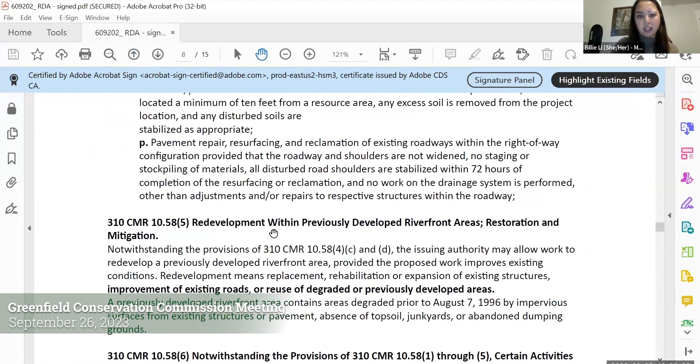Travis, do you want me to share my screen and run through a little bit? Okay, great, yeah, that'd be great. I'm just going to ask you all to bear with me because I'm operating from my home office on my laptop, and I am used to having 3 screens and a nice mouse. Let me just move this over. All right, so I'm not going to go over the project description too much, but I did want to highlight some of the wetlands protection exemptions. Is that a good zoom level for everybody? Yeah, okay, great. I know we're all working with different setups.

So the main thing here is that we're redeveloping a previously developed area. This is a resurfacing project. There are going to be improvements to bike and ped accommodations, so that should be good for the area. And then there are also going to be some improvements to the drainage system, as Travis was reading out in that project description. There is the addition of some drainage structures, such as catch basins.

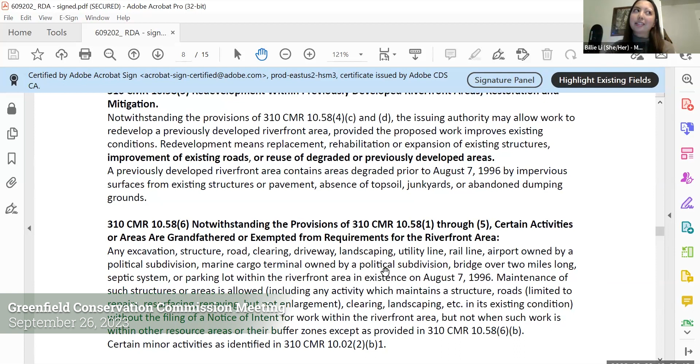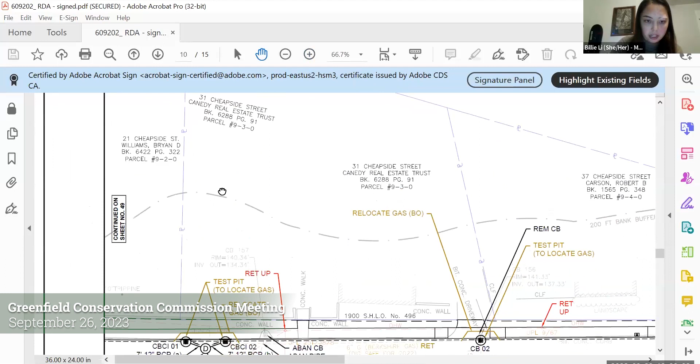There is a MassDOT design standard that requires 2 catch basins on minor arterial roads, which this is classified as. In some of these areas, for example on Cheapside Street, we've proposed 4 catch basins. Right now there's only 1 catch basin, and there's some serious erosion going on. It's even started to deteriorate the asphalt in the roadway, and one of the guardrail posts is completely exposed. That's a result of floodwaters overtopping the roadway rather than going through the drainage system as designed. Adding those catch basins will meet MassDOT standards, developed in conjunction with federal highway standards, and should improve flooding during major storm events.

In this plan set in the RDA, I included the cover sheet just so you guys can see the locus map. And then I included just the sections of the utility and drainage plan that have these additional structures.

We're also planning on making improvements to these head walls and outfalls. A lot of those outfalls either have erosion happening or the head walls are starting to deteriorate. For those outfall improvements, we're going to be putting down geotextile fabric, then some crushed stone, and then some riprap about basketball size. Over time, that should really improve the erosion happening in that area.

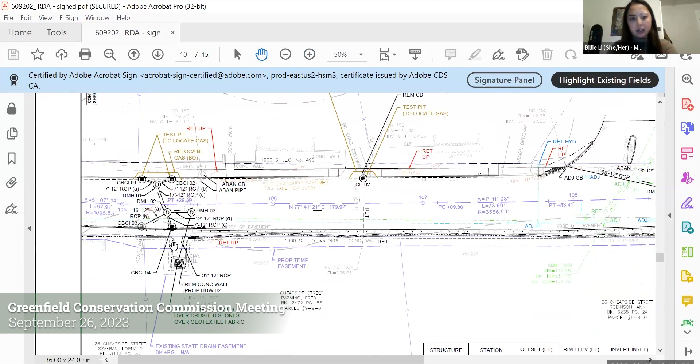There are 3 of those drainage outfalls - you can see the little cutouts for them. Those are going to require a temporary easement, but it's temporary, just so we can get in there and make those repairs because there's significant erosion happening at those outfalls.

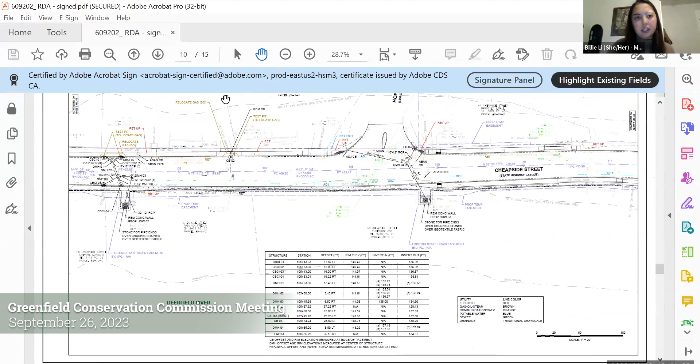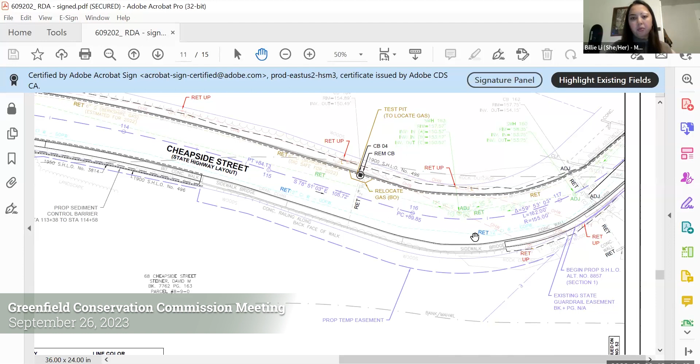As you can see here, this dotted line is the bank mean annual high water line, and these areas are within the 200-foot bank buffer / 200-foot riverfront area. I also wanted to note another resource area on this project is land subject to flooding, right in this corner where Cheapside Street comes under the railroad. Elevation is going to be maintained, so no issues there, but I wanted to mention that was another resource area we were aware of and took into account in our design considerations.

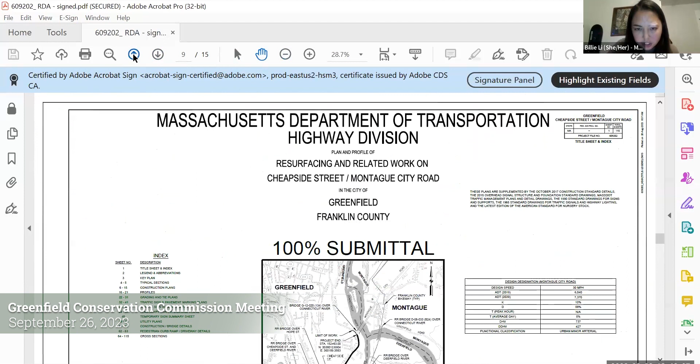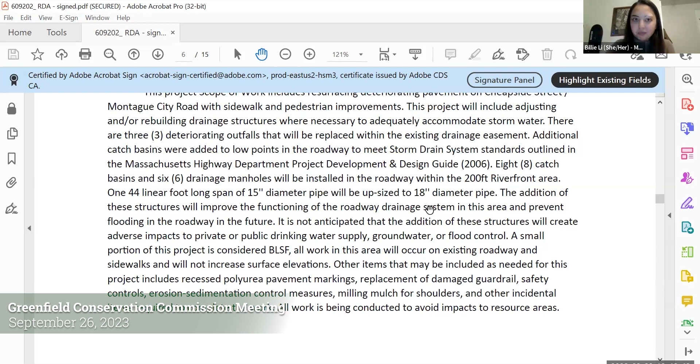So that is my quick spiel on it. But if anybody has any questions, I'm happy to address those.

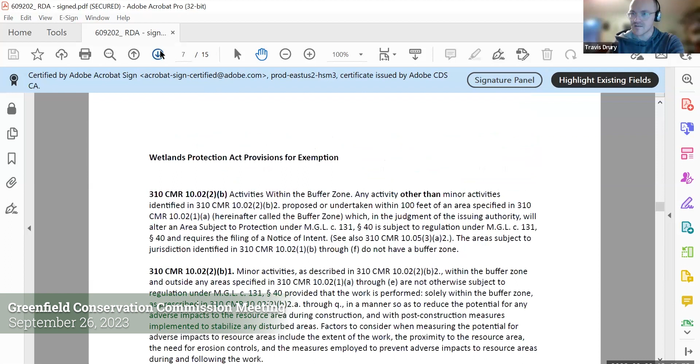Is this a limited project? What do you mean by limited project? Is it an ecological restoration limited project? Is it being filed? No, this is just a regular RDA, sorry. Okay, maybe I'm in the wrong one. Yeah, I'm in the wrong one.

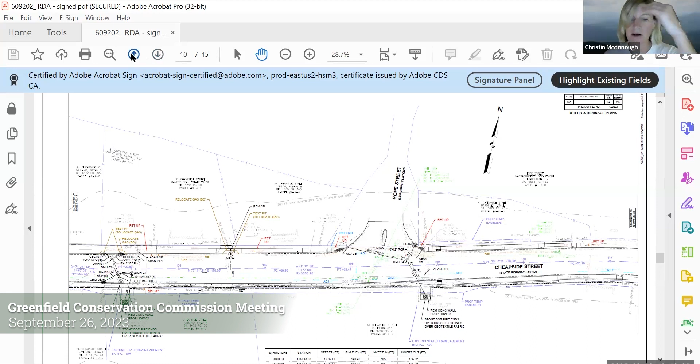My apologies. No worries - would you mind just addressing the exemptions again? Absolutely, it was kind of cut off before. I think I saw the riverfront area ones, but there was something above it that I couldn't catch.

So up here is 10.02(2)(b)2, which discusses some activities that are exempt, and that's typically the exemption for resurfacing, milling and resurfacing. We put that in there because this is a resurfacing project. And then in terms of the redevelopment within previously developed riverfront areas, that's more for these drainage structures and that kind of thing happening within the roadway.

Okay, so it's within the existing right of way. Mhm, thank you. The only thing that's outside are those drainage outfalls, which will require temporary easements. I don't know if any of you have been out there recently, but the situation with the erosion is definitely calling for that work to be done.

But it's exempt. So the drainage outfalls will require a temporary easement, so it's outside of the state highway layout area, but that area is developing previously developed riverfront area because there are already drainage outfalls there.

I guess it seems to me that the outfalls—like all of these exemptions talk about being within the existing roadway. And since that's outside the existing roadway...

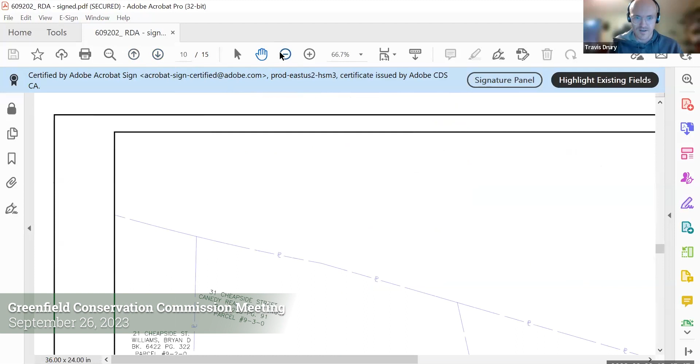Could you show those on the map again? Yeah, absolutely. Those were within, or at least two of them were within riverfront area. Maybe all three of them are within riverfront area.

So here's the first one. As you can see, our state highway layout ends about here, and so it would require this temporary drainage easement in order to do that work. Again, these aren't new outfalls—these are existing outfalls. Head walls are deteriorating, they don't have a splash pad, so they're creating an erosion channel down into the river. We would be replacing them where they exist now.

Is that riverfront area already developed where you're going outside the right of way, or is it lawn? So where the drainage easement is shown right here, there is an outfall right there, so we're replacing the drainage outfalls. So it's concrete, it's not grass. No.

And you said the footprint isn't really increasing for any of these? No, the footprint is not increasing. This is just a temporary easement that's required to get in there and do the work around the head wall—it's an existing head wall, or drainage outfall with a head wall that's there, and they're going to go in and repair the head walls if they need to, and then put in a splash pad. Not concrete—it's going to be geotextile fabric, crushed stone, and then riprap about basketball size on top of that to prevent further erosion in that area.

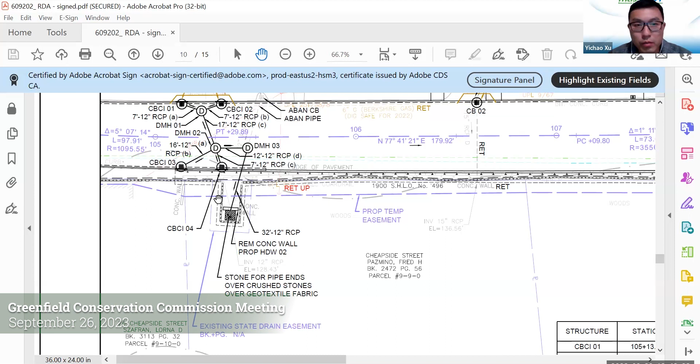Billie, can you just zoom in a little bit? For the concrete wall—you can see this concrete wall in gray, that's the existing one. And we have a leader that says remove concrete wall and proposed head wall. Number 2 means we're gonna remove the old wall and build the new wall there. Another leader shows the stone for pipe ends, which is a big stone weighing between 50 to 150 pounds over the crushed stones.

The crushed stone is about 3/4 inch stones over the geotextile fabric, which can mitigate the erosion that happens. The reason why we put smaller stones on the geotextile fabric between the bigger stones is just in case the bigger stones are too heavy and would penetrate the geotextile fabric. So it's more like boulders, then your angular riprap, then the geotextile fabric. Yes, thank you for explaining that. Oh, you're welcome.

Any other questions?

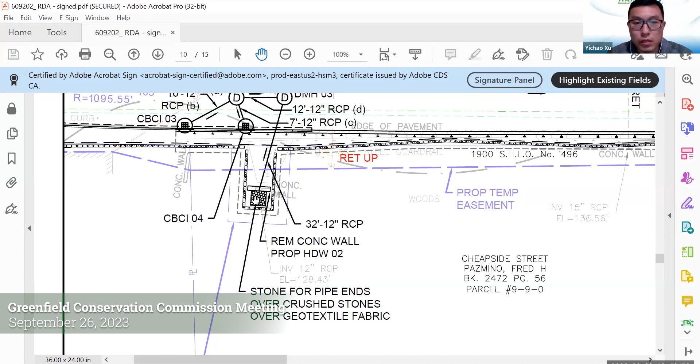So I want to add in something else with the existing easement. Billie, can you just move the plan a little bit up? You can see the purple leader down there—move down a little bit. Right there, yeah—existing state drainage easement, but this is the older plan.

It says book and page number not available, not applicable. But I did a thorough study in the Franklin Registry of Deeds, and I did find the book number and the page number back to 1951. I updated it in our right-of-way plans, but we definitely have this easement belonging to MassDOT. So this is our permanent drainage easement.

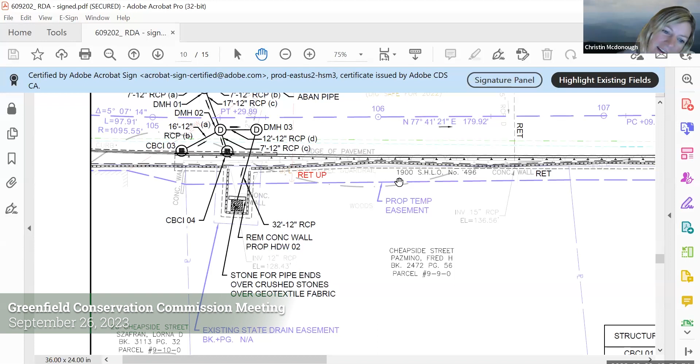The purple dash line, or where the leader is pointing to - I can't tell if it's gray or purple. This is on the south side. I think it's a purple one. Yeah, it's a purple one, pretty thing. Oh okay, sorry, I didn't realize that.

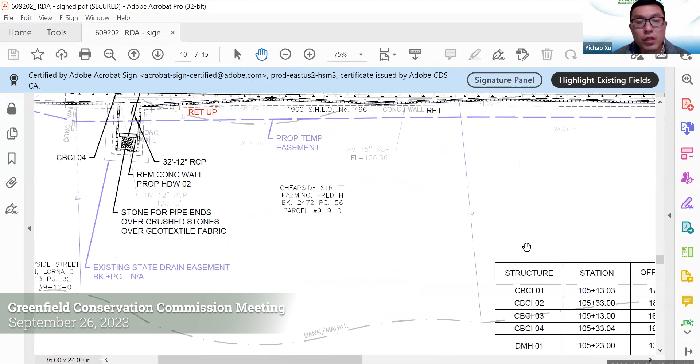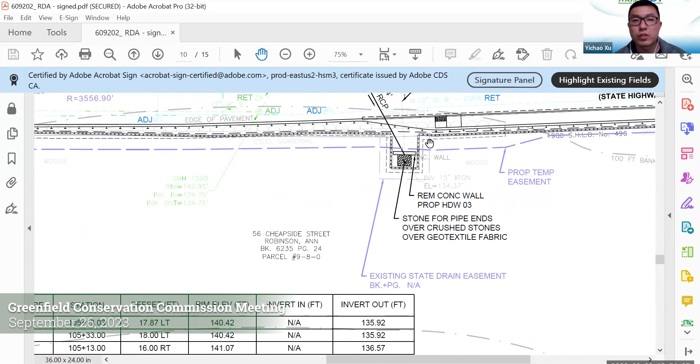Is that the case for every single one of the head walls, Yichao? I think for this one, the second one, and the third one. The first one - yeah, we require the permanent drainage easement because the current head wall is within our state highway layout lines. We're going to extend all the stones and fabric, geotextile fabric, which is going to be beyond our state highway layout line. That's why we need to require the permanent easement to do the proposed work.

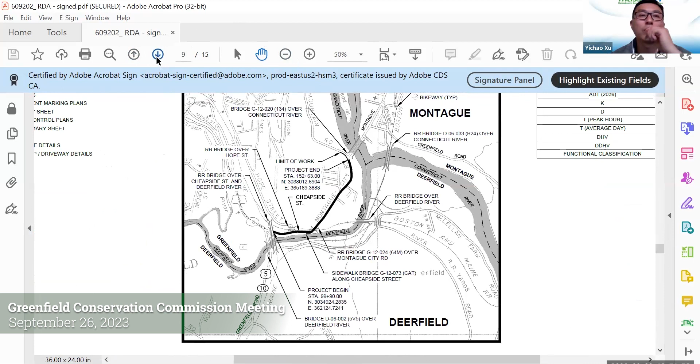So if you go to the first sheet, sheet 9. This one - oh, you don't... no, I only have the highlights from the utility plans. I didn't put the whole key in there and everything. Whatever that area is, the first head wall is not a problem.

So yeah, I actually misspoke. This purple line here, you can see existing state drain easement. So Yichao, correct me if I'm wrong, it's technically outside of the state highway layout, but we do have the drainage easement there. Yeah, we do have - we have the book and the page numbers, which we acquired in 1951 back when this street was originally built.

And you guys have an annual operation and maintenance plan approved, you've got your BMPs already kind of approved for any work that you do, right? So any questions we might have on erosion and sedimentation control are probably in that OMP. Yes, and we have MassDOT standard specifications for all of our construction projects that require erosion and sediment controls. I guess I'm mostly wondering if you're going to have sediment bags in catch basins, if you're going to be doing any kind of earth disturbance around them.

Yeah, so exactly what erosion and sediment control is used kind of dips into the means and methods of the contractor, but it is a requirement for them to use erosion and sediment controls - we're just not going to be specifying exactly how they should be doing it.

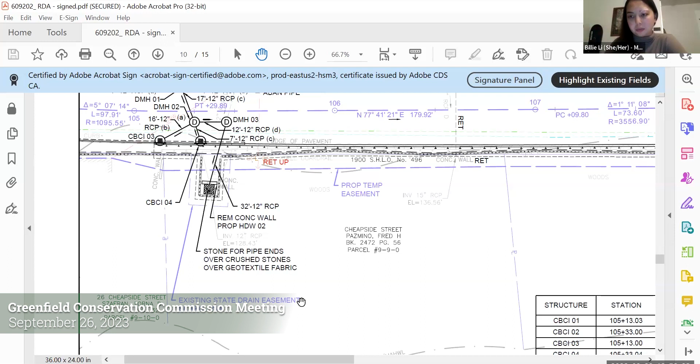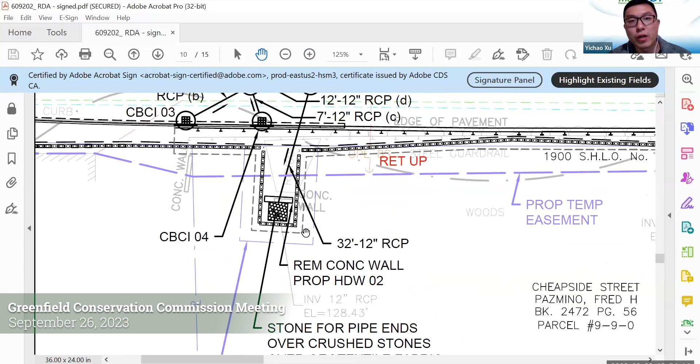So I do propose all these sediment control barriers at the bottom or top of slope. You can see that's what this rectangular pattern is, right? Yeah. And for all the existing and proposed catch basins, I also proposed asking the contractor to put a silt sack to prevent all the silt or fine particles from going into the river systems.

Can you tell me when the work is planned for, and ideally what the time frame would be, how long it would take? Yichao, do you know the ad date off the top of your head? The ad date is January 2025. I'm expecting the contractor to start work probably in summer, maybe early spring of 2025. Our estimation for this whole project is going to be one year.

I believe the contractor is going to start - they're going to set up all the silt fence and sediment control barrier first, then they're going to start the drainage work. Because this is basically a resurfacing project, we're just going to mill out all the HMA pavement. So they're going to do the drainage work first because they have to dig holes everywhere to drop in the proposed drainage structures. After doing that, they're going to do the milling and repaving, together with all the other sidewalk construction and the proposed guardrail installation.

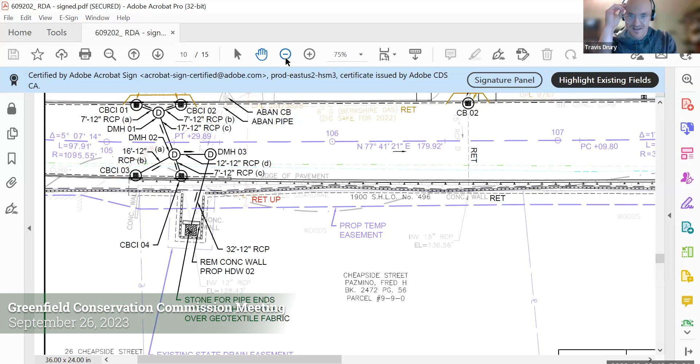Yeah, so I'm just trying to go through the logic of the exemptions in the Wetlands Protection Act, because I think you have to read this and refer to that and refer to this. Do you want me to go back to the exemptions I included here? The first page is 10B 2B2, which is just the pavement portion, but these bottom two are kind of about the riverfront area.

And for BLSF, just to reiterate, you're not doing any subsurface alteration like flood storage capacity changes, right? The elevations of the roadway and sidewalk are going to be maintained in that area, and it's also a very small portion, but yes, they are going to be maintained.

So I guess, 2B1, 2 — I'm not sure. I'm kind of getting hung up on the pavement part too, because in the exemptions, what am I looking at here? When I'm looking at the Wetlands Protection Act, I'm looking under redevelopment, number 6.

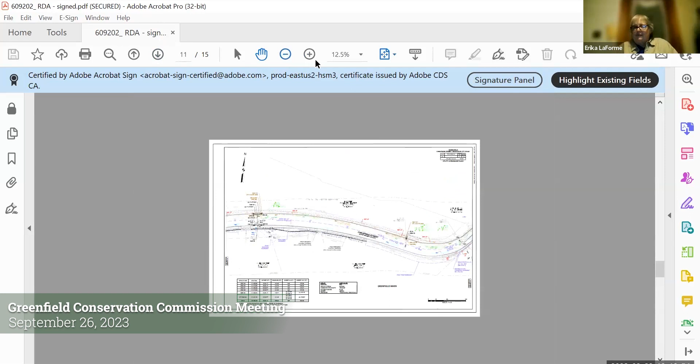In terms of increase in impervious area, there is going to be a slight increase for those sidewalks, but that is within the state highway layout. Oh okay, the state line. Okay, mhm.

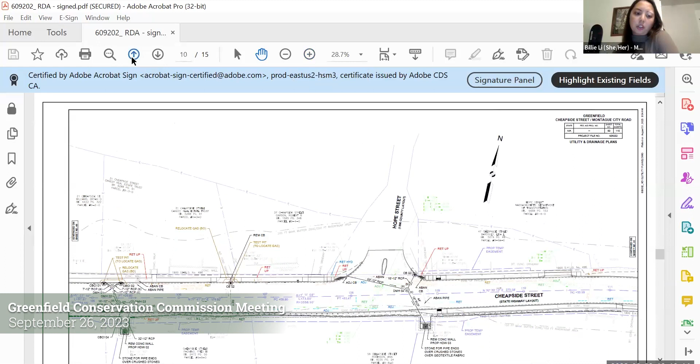And so I guess with the easement, in my mind, the easement is just saying that you have the right to have drainage structures there, but for the exemptions, that requires the work to be within the existing road surface area, which that would not be. But having the easement does say that you are allowed to use that land. That's my understanding? Yeah, I think typically the state highway layout is thought of as the footprint.

Because that includes guardrail and all that stuff too. So yeah. But then, unfortunately for this project, there's also that language that says it would be exempt if no work is being done to the drainage. So I guess, yeah, that drainage piece is definitely the gray area here.

So for the commissioners, that's where I'm hung up on. It seems like it would have to be like if they were replacing existing manholes and existing catch basins, then I think that's fine. But I think because it's an expansion and modification of the stormwater system, and the fact that it's not just within riverfront area, but also there's the buffer to the bank, there are other resource areas and buffer zones going on too.

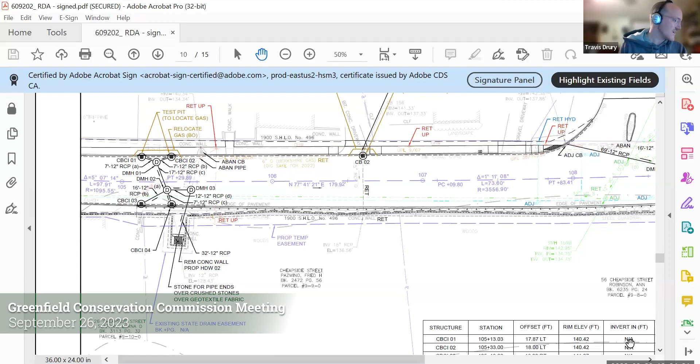So a motion for positive determination, that was seconded. Any other discussion among commissioners before voting on that? Just looking, I gotta switch the video so I can see Fletcher to make sure we weren't all trying to talk. Okay, yeah, no, I didn't have any additional discussion. Okay, yeah, I just wanted to make sure I wasn't skipping anything.

All right, so we'll do a roll call vote on that motion for positive determination. Fletcher, aye. Erica, aye. Kristen, aye. All right, I'm also an aye, so that motion passes.

I guess we'll be requiring a notice of intent for this project. And I mean, it's not worded in the motion, but it does sound like it would fit within redevelopment of riverfront area, just based on what I'm reading right now. Yep, absolutely.

Yeah, my recommendation is in the NOI, just beef up your description on how your drainage improvements are not just a safety issue, but protecting down-gradient resource areas. Consider that in the application. DEP cares about safety, but cares about resource areas first. Right, of course.

All right, great, thank you for that. And then in terms of the positive determination, is there a form that you guys send to us? Yeah, I think Mitch will send it. Mitch, I don't know if you can confirm. I think it's the order of conditions form, but it says positive. Okay, yeah, and you just check the positive box and send that.

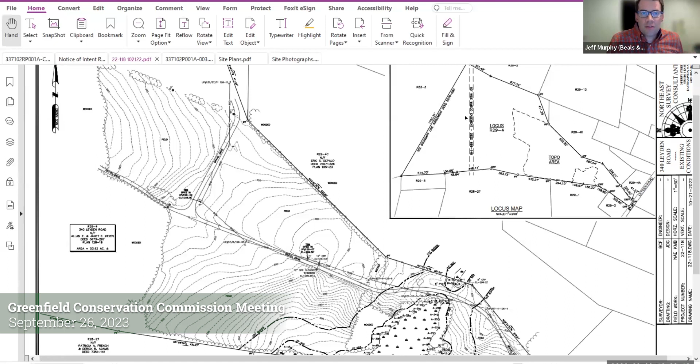So as Colleen mentioned, the project is located on an approximately 54-acre parcel at 340 Leyden Road. The proposed solar project is going to be located within the limits of an existing cleared area that's been maintained as a grass field and used for haying and agricultural purposes.

There's an existing driveway that services access to the existing single-family home on the property. That gravel driveway starts from Leyden Road and follows the central portion of the property, going between two existing on-site wetland areas, the boundaries of which were previously confirmed as part of an ORAD issued in November of 2022.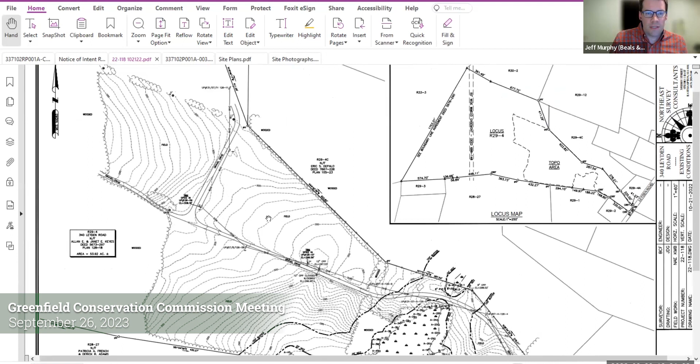The driveway continues through the existing grass field, generally running through the center of the field, and then turns to the right and goes to where the landowner's house is. So the project is primarily going to be located in this central field.

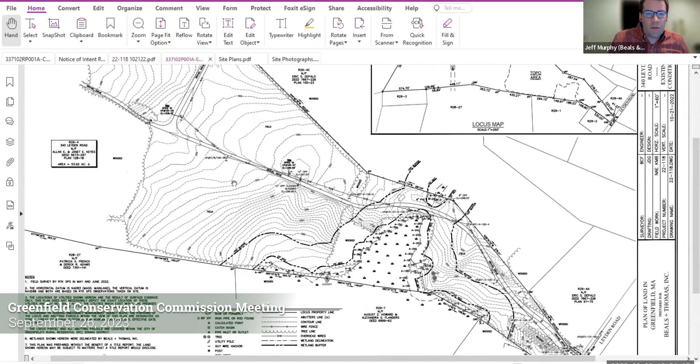As part of the project, just a quick overview of the layout. There's going to be some reconfiguration to the existing driveway within the vicinity of the area where the panels are going to be placed in that open field.

That was primarily to consolidate the footprint of the panels, and also serving multiple needs to maintain access for the homeowner, basically to reroute the driveway along the northern property boundary, which will then split off and provide access to his house.

There'll be a continued section where the road is rerouted around the panels, and there'll be a cul-de-sac turnaround area provided to maintain vehicle and truck access throughout the property, as well as for future dual-use solar project needs. The existing gravel driveway will be discontinued through the central portion of the site, and a T turnaround will be provided for fire department access.

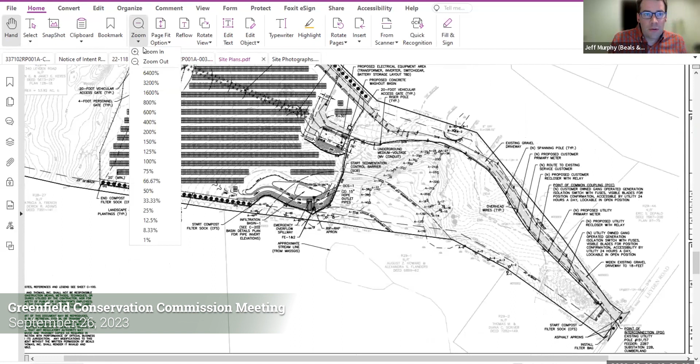So I'll switch over to a more zoomed in view of the project. As I noted, the existing driveway is going to undergo some improvements associated with the proposed solar facility design.

There's currently utility poles and overhead wires that run along the existing driveway that provide power to the existing house on the property. In order to maintain that, and also provide a future electrical interconnection between the project and the electrical grid, there's going to be some additional utility poles installed along the road, essentially creating two parallel lines of poles on either side of the driveway.

In the section where the driveway runs between Leyden Road and this vicinity, there's going to be some slight improvements done for utility company requirements. Then in the section where we go between the buffer zone between the wetlands, the driveway is going to remain as is, and then it's going to split off just before you enter the field and continue along the outside of the fenced-in area.

So the proposed panel area is going to be fenced off with a 7-foot high chain link fence that will have a 6-inch wildlife gap at the bottom of the fence to allow for small wildlife passage.

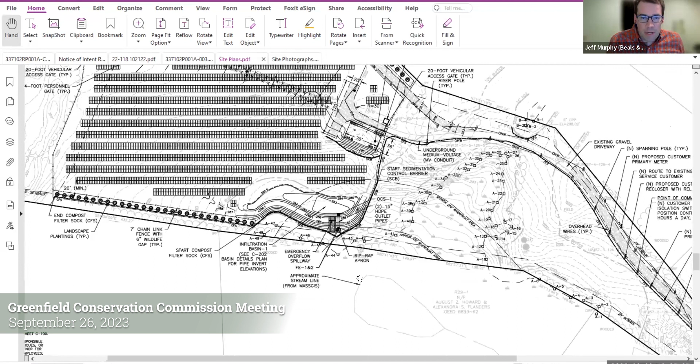And we're also doing work within a previously altered section of the outer riverfront area, which is associated with an off-site perennial stream. That area of disturbance is roughly 2% of the total RFA on site.

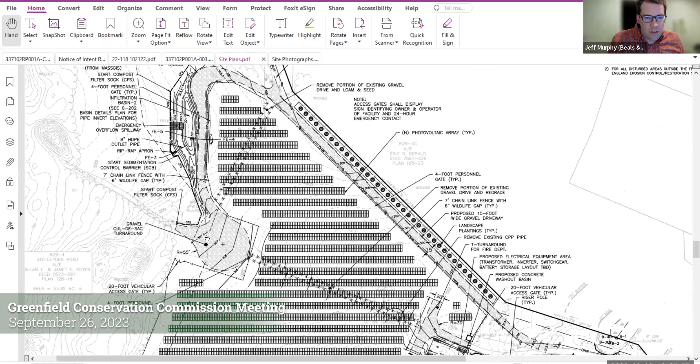And then we also have a portion of the site here at the western extents that is within the NHESP priority habitat. There's a small section of the project, including this piece of the turnaround, as well as the western limits of the array and fence line that go within that zone.

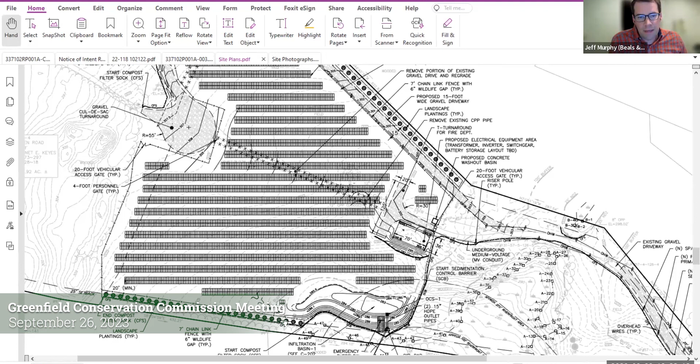In terms of other general things to note, we're proposing screening plantings, which is more something that's just going to be associated to satisfy the screening requirements of the local solar bylaw, but figured that would be worth mentioning as well.

Again, the idea is to try to keep the project contained within that existing grass field that's out there, doing minimal grading, and relying on the existing drainage patterns that are out there today. That's kind of the general overview of the project.

So I don't know if there's anything else that Caroline wants to add to that, anything I didn't mention before we kind of turn it over to questions.

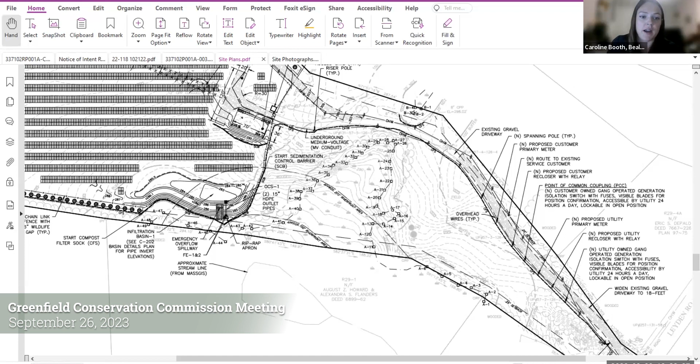Yeah, thanks, Jeff. Caroline Booth, Beals and Thomas. I think just additional items to add, as Jeff noted, part of the site is mapped within NHESP. Those are areas that are previously cleared. This was submitted as a combined notice of intent and MESA filing, so it was provided to NHESP to review and provide comments. We're still within that 30-day window.

I haven't heard anything from them yet. I'm not sure if Mitch has an update on that. And we did receive some preliminary comments from Mass DEP, which we have also addressed via email, which I believe Mitch and Travis were also on. Other than that, I think we can take any questions from the commission.

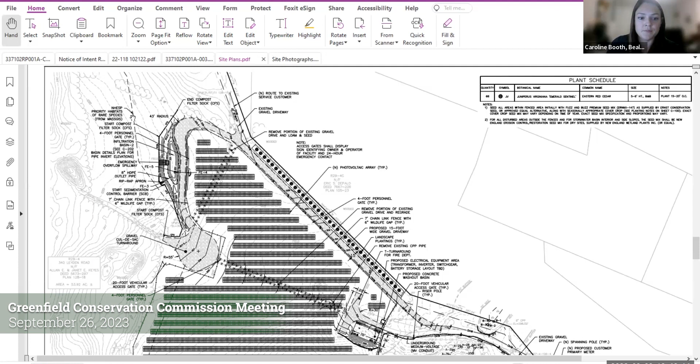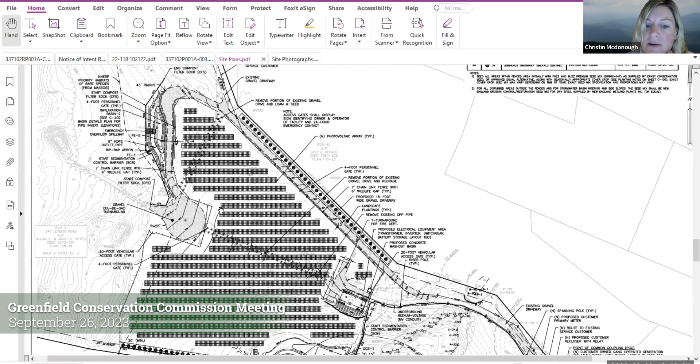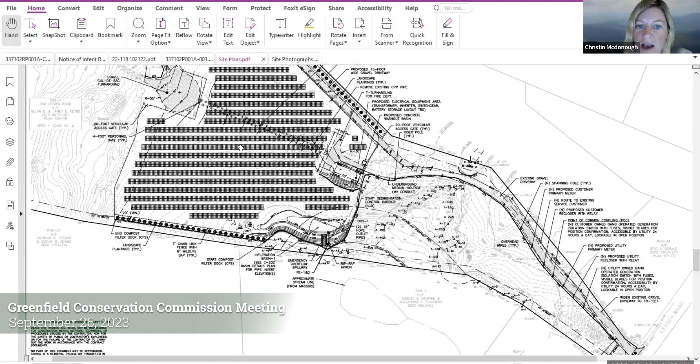Anyone want to start off with any questions? I have a few. I remember walking the site when you guys filed the ANRAD, and I know you've since been issued an ORAD back in November 2022, for the approval of those two bordering vegetated wetland lines. I was just curious, the ORAD's for those two wetland lines, but the development is much further to the west, I'm assuming. So, Mitch, maybe you can remind the commission if that ORAD locks in the wetland lines for the entire parcel, or does it just lock in the wetland line that we reviewed as part of that ANRAD? Just the parts that were reviewed.

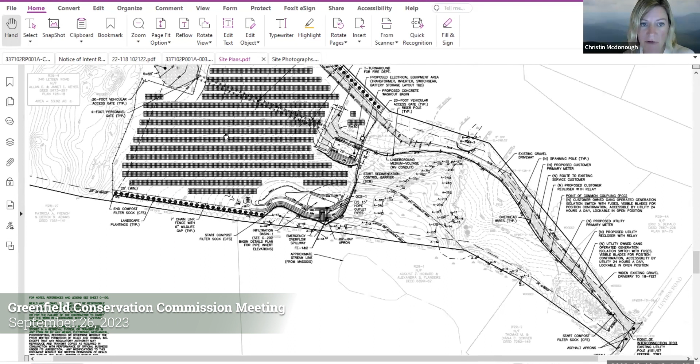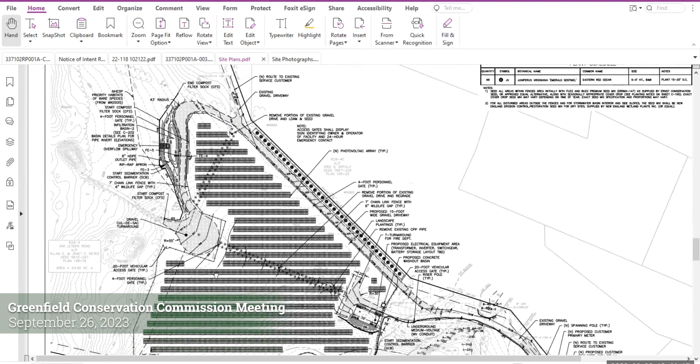So we don't know if there's any jurisdictional resource areas associated within the 200-foot or 100-foot of the solar array other than the A line? It looks like, on the western portion, it's way back. Yeah, this site was evaluated by a wetland scientist for the areas within 200 feet of the project, and there were no other areas identified. As Mitch mentioned, though, the Green River is located on the far west side of the site, which is well over 200 feet away from the project.

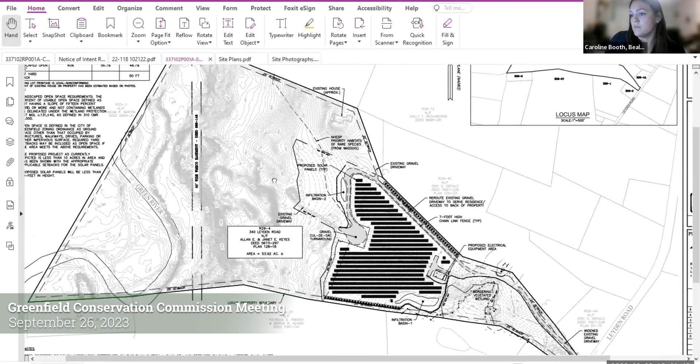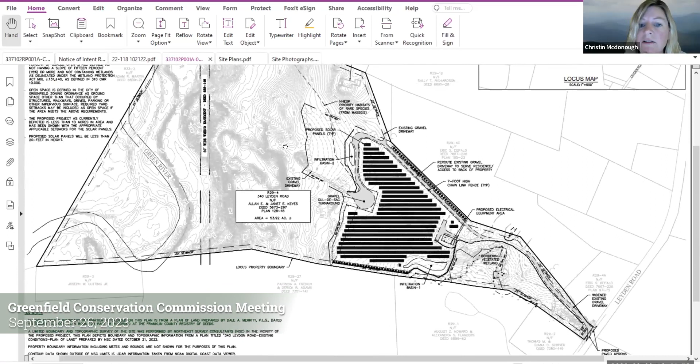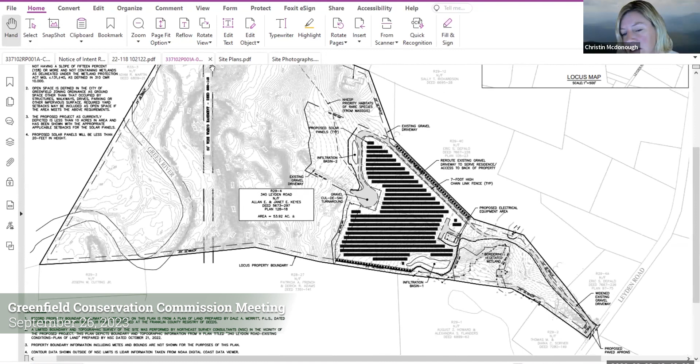I know we can't really get too in the weeds with this until we have a DEP file number, but one of the questions that I had when I did the site walk was about that culvert that's between, I guess, the A line and the B line. I can't remember what the culvert looked like. It was just like I don't remember if it was metal, corrugated metal or plastic or what, but I'm curious if that will have to be upgraded to withstand construction vehicle traffic during the solar installation.

We're not anticipating any changes would need to be done to that. It's called out as an existing 8-inch corrugated polyethylene, probably an HDPE pipe. I believe it's pretty decently far below the surface grades there.

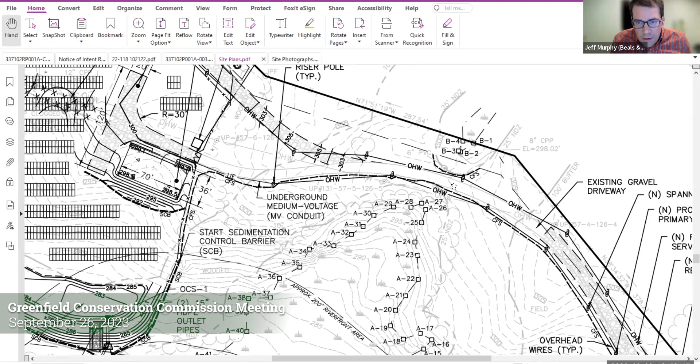So we're not anticipating that would be impacted at all by construction traffic. Okay, so you've already accounted for the heavy loads and stuff coming in. You think that'll handle it? Yeah, I mean, I think it's pretty far down.

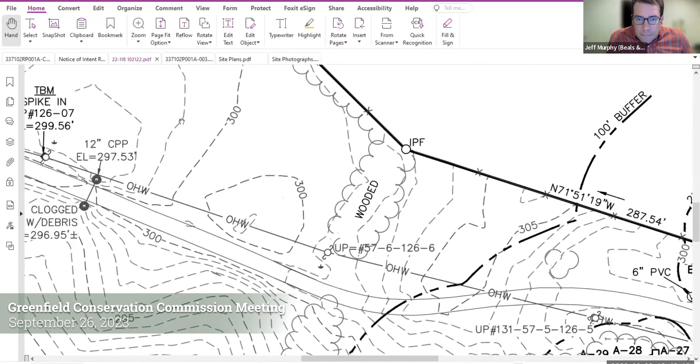Trying to zoom in on a contour here so I can see the pipe invert at the upstream end, 298, 300, 301. I mean, I don't anticipate that being an issue.

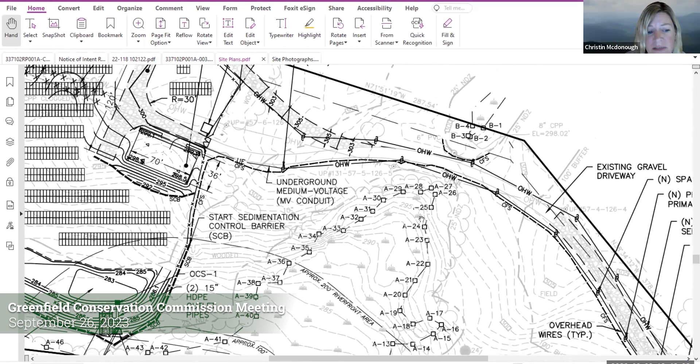I just had one other question. You had mentioned that the bioretention basin is really close to the wetland limit, and it's also in the outer 200-foot riverfront area, but you had said that it was previously disturbed. That's agricultural land right now, correct?

So it's just, yeah, this is kind of what it looks like. It's all basically mowed, maintained area. So the basin is going to be located generally in this spot where the topography levels off. It's going to be a bermed area here, a very shallow basin, basically providing some runoff rate attenuation prior to discharge here. So you can kind of see the existing tree line in gray here.

So it's generally in that corner of the site. This dark line here is the outer portion of the 200-foot RFA. And again, the 25-foot no disturb line is generally a few feet off of where we're proposing our sediment control barriers. So we're proposing a sediment control barrier at this downgradient portion of the site, consisting of a silt fence and a straw bale, but elsewhere calling out as compost filter sock. Generally in the areas where water gets concentrated, we like to have a silt fence for better protection of the resource areas.

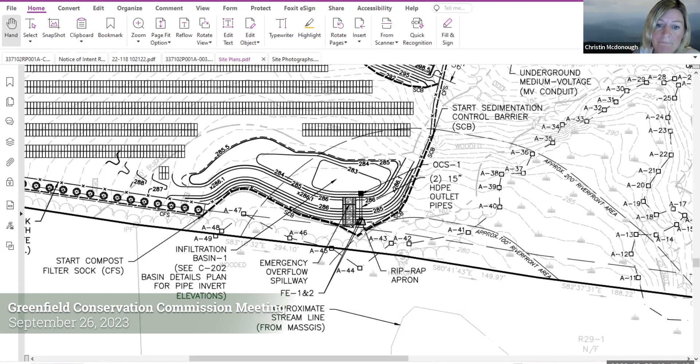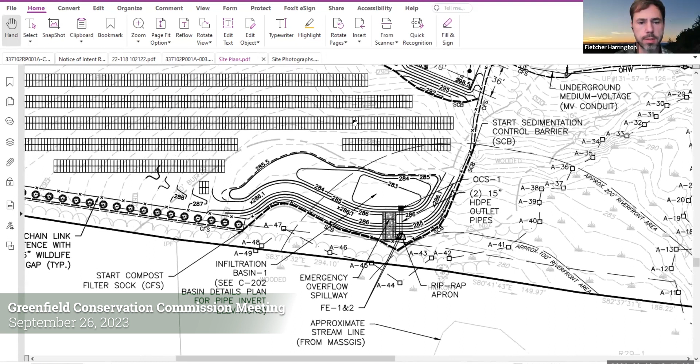I was just wondering, sorry if I missed it, but is there grading within the field other than driveway improvements and the basins? Is there any other sort of large areas of grading?

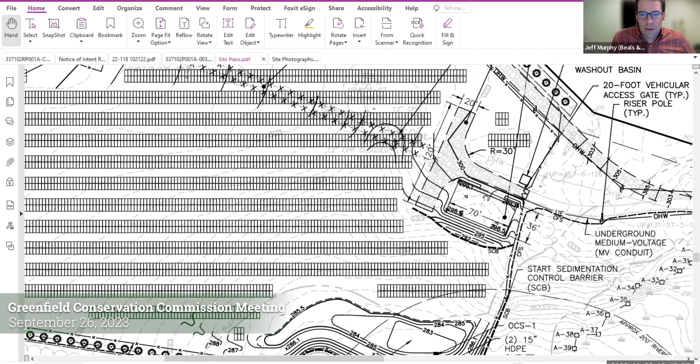No, so the idea is that we're going to try to maintain the existing topography to the extent practicable. Like you mentioned, the areas where we're going to be having the equipment pad will have to be flattened off, and then for the driveway, the goal is to basically remove the existing portion of the driveway that runs through the middle, and then we'll just keep all the other grading as is.

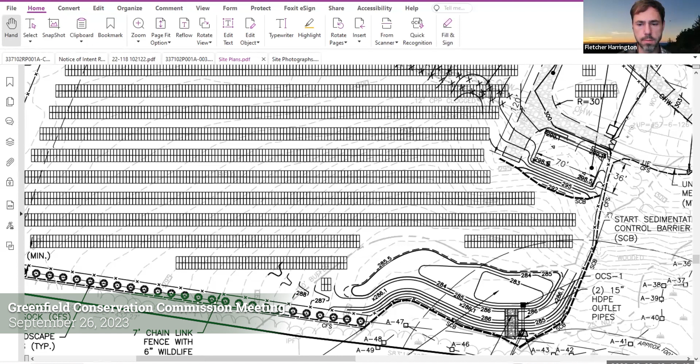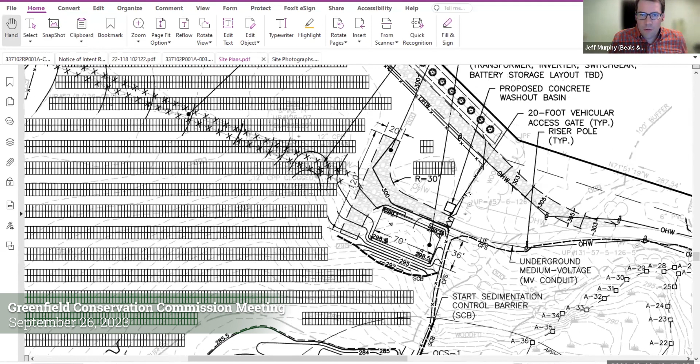And then, sorry, did you say anything about tree removal? And if so, is it marked on the plans? So yeah, we don't have any tree removal proposed within the array area at all. It's going to be situated within the limits of what's existing. The only area where there might be some tree removal is right here, to split the driveway off and follow the northern property boundary. So that would be the only area where we'd anticipate tree removal to accommodate the driveway.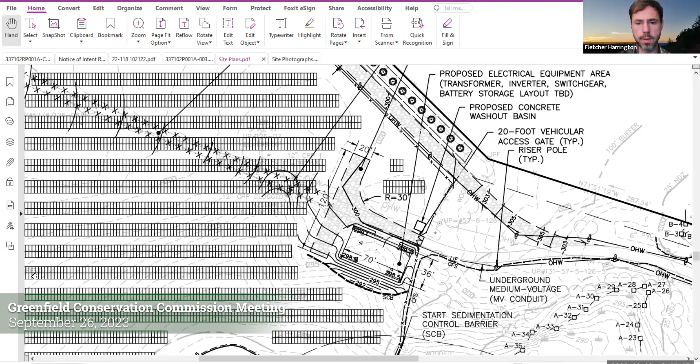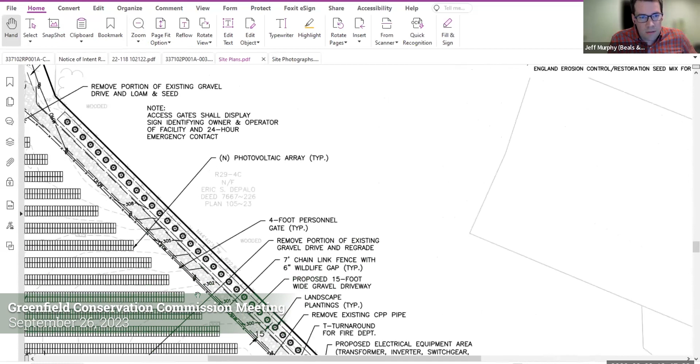Got it. And what were the proposed plantings along the edges there? Sure, let me just go up to those here. So right now we have them proposed as eastern red cedars for the screening plantings, along the northern and southern boundaries of the property. Got it.

I think we can only make any comments on them if they're within jurisdiction. And I don't know what the planning board requires.

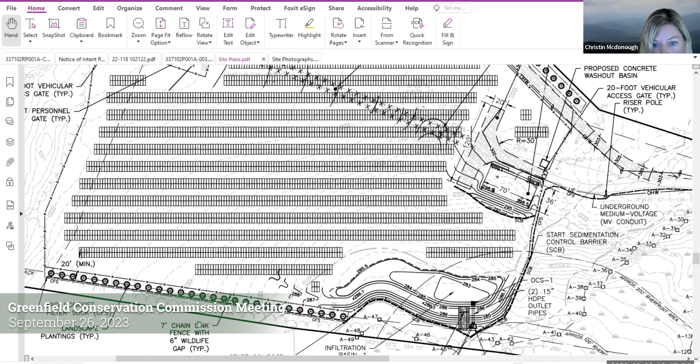And it looks like the plantings go right to the—oh wait, no, they're in the buffer zone. There's a few of them in the buffer zone here. 1, 2, 3, 4, 5, 6—about 6 of them.

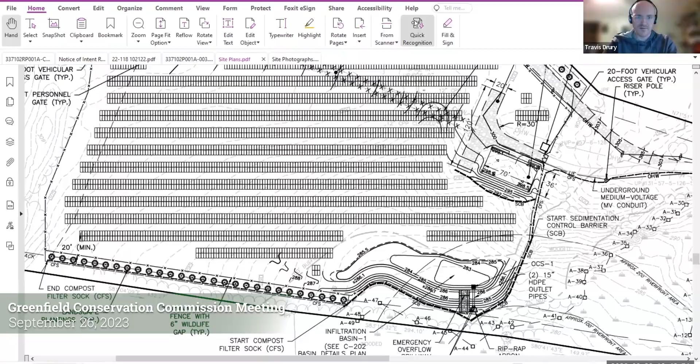So if no one else has any immediate comments, it could be helpful to look at DEP's initial comments and the responses to them, which I can read here. Let me share this. So this was just in an email exchange. These are the responses to the comments in black.

Number 1, this is not a buffer zone only project, as you checked off. You also note riverfront areas. They revised the form. Number 2, solar projects are category 3, not category 2. Their response was that the applicant has agreed to pay the additional fee requested for category 3.

Number 3 is the narrative on pages 26 and 27 mentions alternatives, but these were not included in the NOI, which the regulations require. Please send those to me and the commission. Please fully explain setbacks imposed. If there are logistical constraints, you need to fully explain them.

D, logistics. Logistics refers to the presence or absence of physical or legal constraints. Physical characteristics of a site may influence its development. Legal barriers include circumstances where a project cannot meet other applicable requirements to obtain necessary permits at an alternative site. The response was, setbacks imposed include the local zoning setbacks as depicted on the site plans.

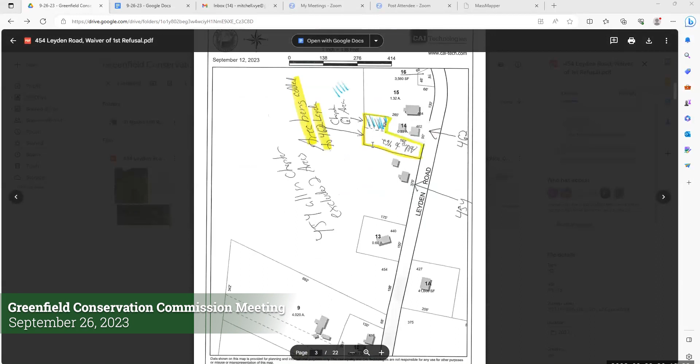Yeah, sure. So it's this little portion of a property that is being sold. The property's under Chapter 61, so that's why we have the right of first refusal on this. Seems like they just want more space for the septic system. So it's just this portion, this big forested area with wetlands, but it's just this section here by the house. So I didn't see any use from us, so we would do a positive recommendation to sell, if that's where we're at.

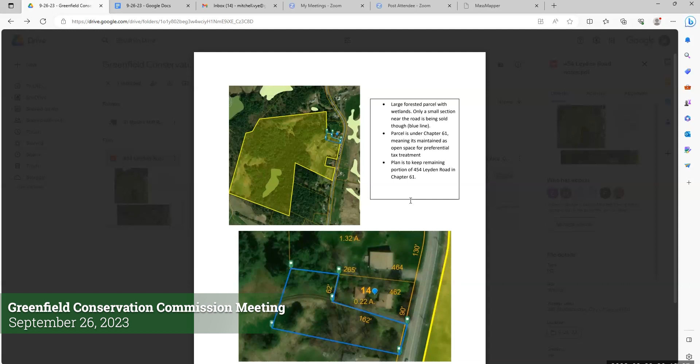Just a quick question. This isn't the same, there was another one I thought on Leyden Road not too long ago that was a big forested area, Chapter 61. Maybe that wasn't Leyden Road, but maybe Route 5 and 10? Across the street from the center school, that's the one I was thinking of. The shape of the parcel made me think of that other one. Yeah, it was like by the Christmas tree farm, right? Yeah, that's a different one. Okay, yeah, that clears it up.

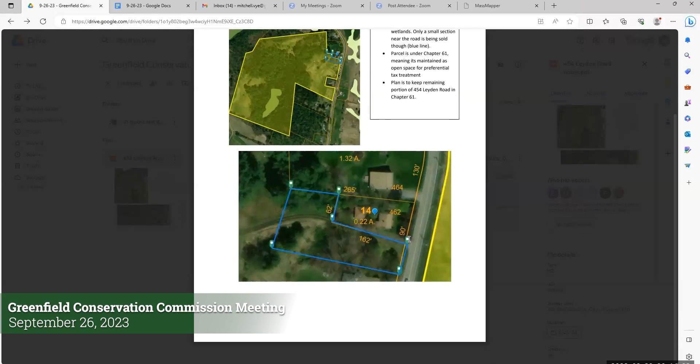I was just getting out a map to look at it. I assume there aren't any wetlands immediately in that part that's being sold. No, the wetlands are way back here, and this looks like just a road, some trees. And then the rest of the parcel is staying in Chapter 61. Okay.

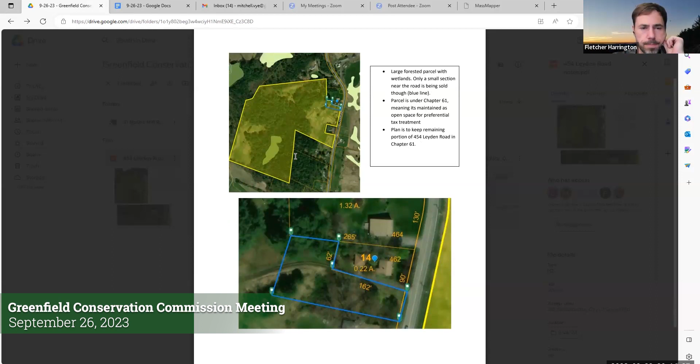Anyone have any questions or comments? So Mitch, you said it would be a positive recommendation if we agree with selling it. Right. Do I need to motion? I think so, yeah. I make a motion to make a positive recommendation to sell for the right of first refusal for 454 Leiden Road.

Second, Erica got the second on that one. I tried to, it's such a blabbermouth. We need people talking, it's good, it keeps things moving. All right, any other discussion on that before we vote on it? All right, I'll do a roll call vote here. Kristen, aye. Erica, aye. Fletcher, aye. And I am an aye. So positive recommendation for the sale of 454 Leyden Road.

So next on our agenda is outreach to fill Conservation Commission seat vacancy. Anyone had any success there? I have not. I will say the city shared an image that said 2 Conservation Commission openings, and then I went to the website a week later and it said 1 Conservation Commission vacancy. So I was like, does that mean they found someone, or they just accidentally had 2 the first time, even though we don't actually have 2 vacancies right now. So I don't know, I don't think they actually found anyone, I think it was just a typo that first time.